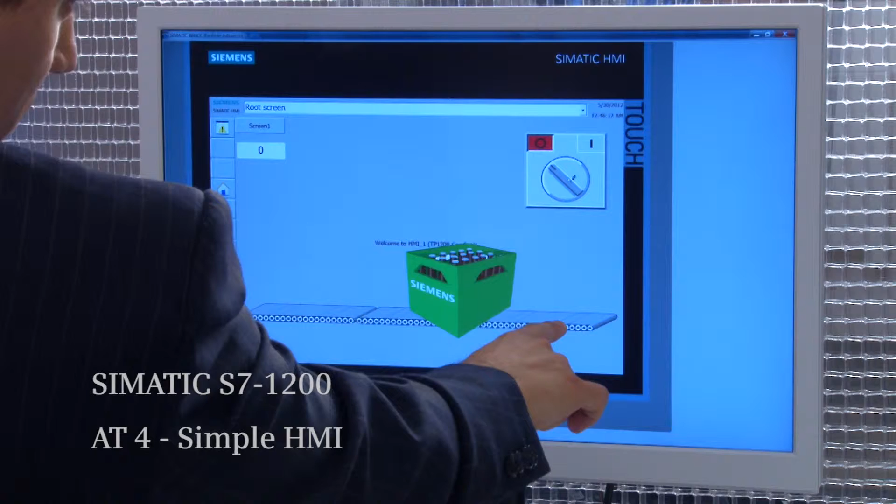The ability to easily add an HMI to your current automation system can be a huge advantage. Let me show you how easy it can be.

So the first step is, you see our current network view here. We only have the controller. First step is add new device. Click on HMI, comfort panel, 12-inch, and click OK.

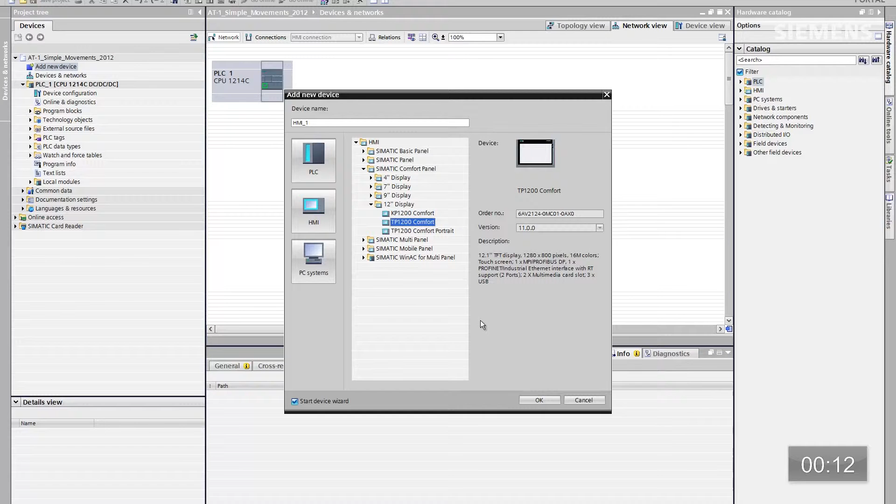So ultimately what the portal is doing for us at this point is creating a wizard for us. We're going to have a pop-up box that easily walks us through the entire HMI architecture we want to use for this particular system. There's a PLC connection as the first button. We're not going to use that. We don't care. Click on Next.

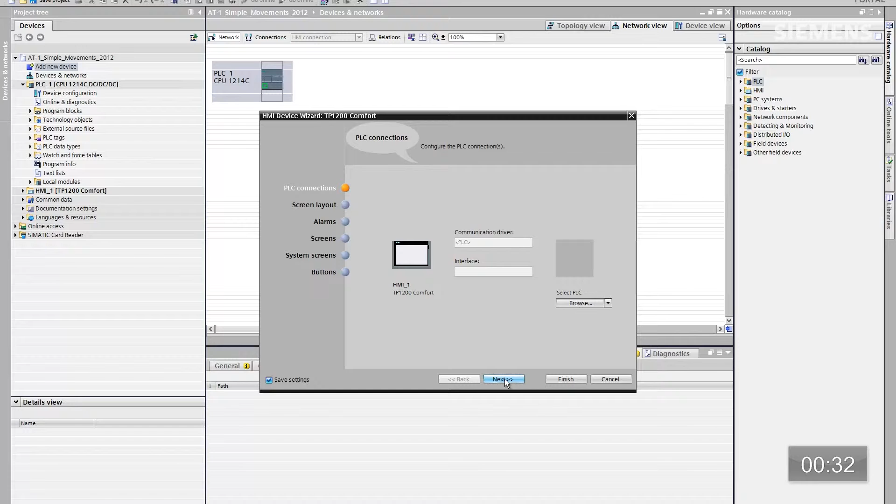You can change the background color here, screen title, navigation field, date, time, logo, whatever. We're going to leave those defaults. Here's the alarms. We're going to keep the defaults as well.

The screens. Here you can actually create your standard architecture of your screens. That way every single time you have a new HMI you can easily go through the wizard and create those screens very fast and efficiently. We're going to leave root screen and screen 1, that's no problem. System screens, we're not going to use any.

And the buttons, as you can see, for this application I want to move them to the left instead of the bottom, and I can easily manipulate the system buttons back onto this with just dragging and dropping them on. And there are my system buttons on the left-hand side now. At this point, I want to click on Finished.

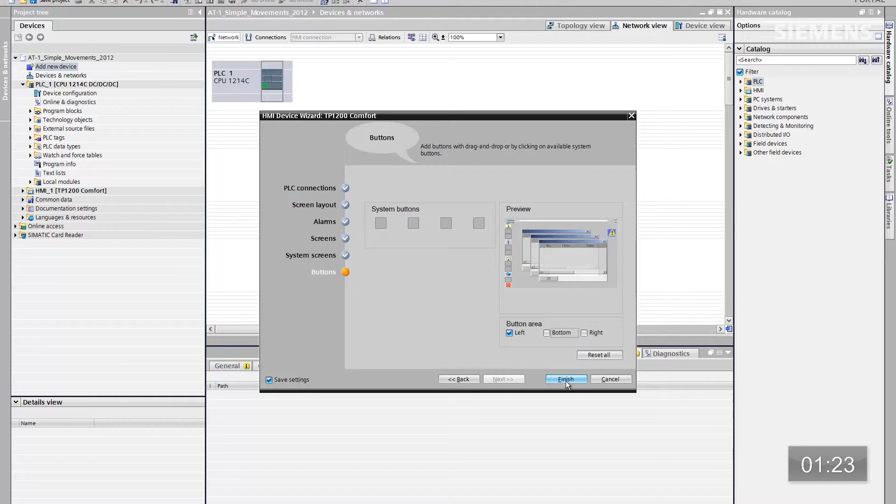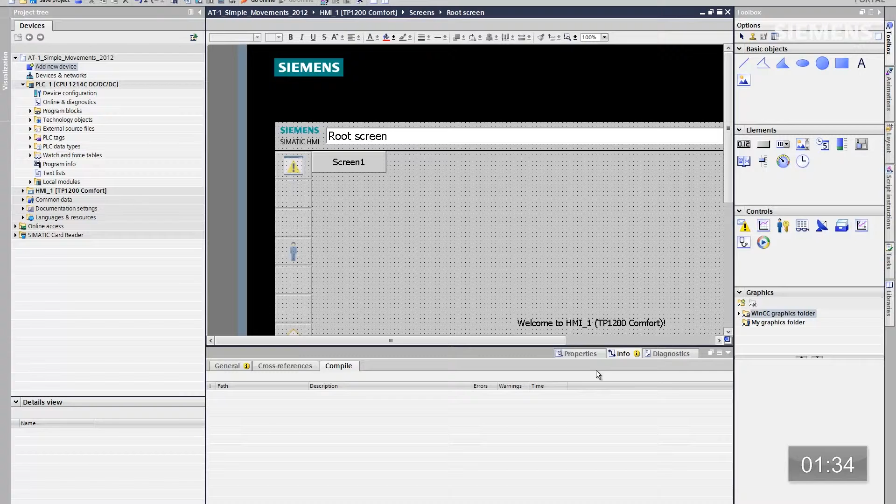So ultimately, what the portal is going to do for us is give us a photorealistic view of this HMI and the screens we just created. Here they are. Let me minimize this and go to Fit to Screen. So here's our root screen.

If we want to add a new screen, all I got to do is go back here in the tree structure and just double click on Add New Screen. Again, it'll give us another photorealistic view of that new screen.

Click on Fit to Screen, and if you want to change an attribute of that screen, now that I have focus on it, I can right click on it, go to Properties, or if I want to change the name, that's what I want to do. Change it to 2. So now I have my root screen, screen 1, screen 2.

If I want to have navigation buttons for this root screen, all I have to do is drag and drop them on. There's root screen. There's screen 1. Now I've got my navigation buttons.

Now that I've accomplished the new screen and all the standard HMI architecture, what about actually tying it to the current code? Something I want to show you real quick. If I go back to Device and Networks, you'll see now I have my current automation architecture including the new HMI, but they haven't been networked together yet.

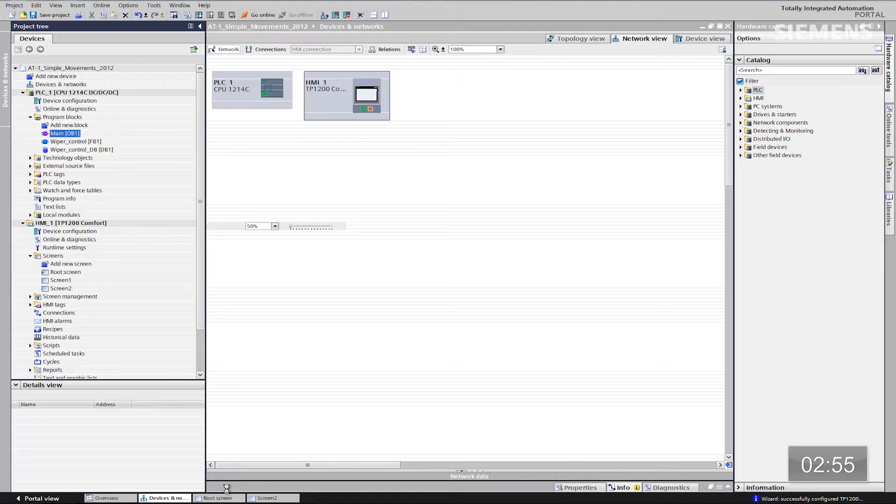If I actually go back to the code of the current control system, program blocks, main OB, let's double click on that. Now that I have the code of the automation architecture, I want to give focus to the root screen and choose split screen. So now I have the actual brand new root screen as well as the code from the current automation architecture.

If I want to tie them together, what I want to do is just go grab a bit field from the code, drag and drop it on. And you see I get these little alignment bars just like you get when you do anything in PowerPoint. That way you can easily take boxes and make them align the way you want to.

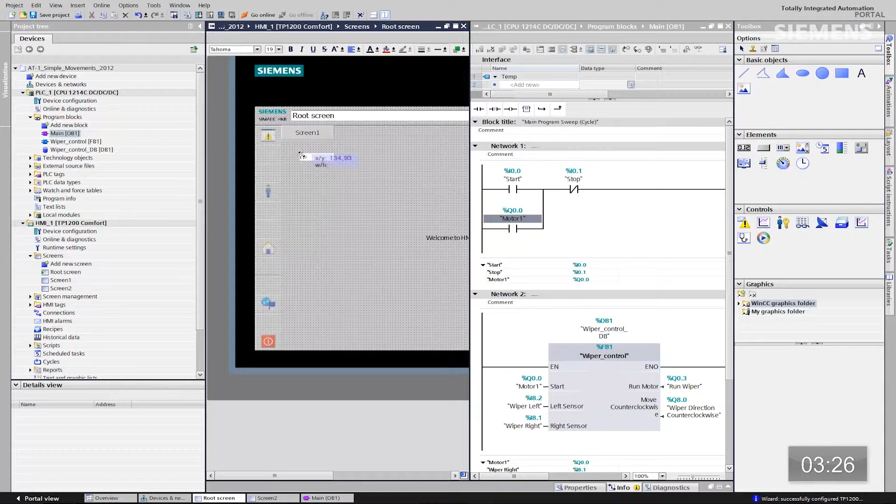If I want to resize, refit this I/O field, all I got to do is go grab one of the corners, drag it to wherever I want it to go. If I want to actually do an attribute change, just give focus to it, click on Properties. Let's change the text size, for instance.

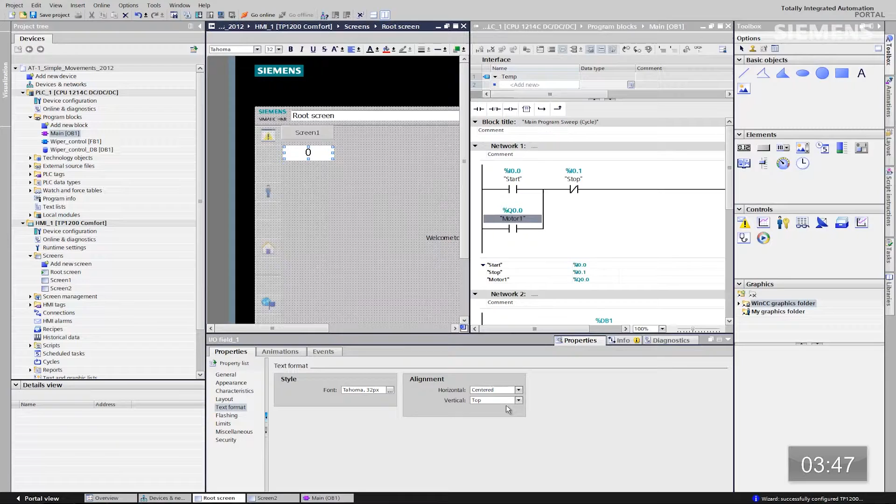Instead of 19, we want to use 32. Click OK, and I also want it to be centered. So now I've changed the attributes of this I/O field. Let me click off the split screen and let me show you the device and networks.

So now if I click on this little icon here, Show Address Labels, the moment we pass that I/O field from the code to the actual HMI panel, it automatically created the Profinet network, the IP addresses, device names, including even the logical connections. It did everything in the background for us. That's how smart the portal really is.

Okay, so the network is now complete. How about the actual control? Let me go back to our root screen. Let me drop this down and let me go to our libraries.

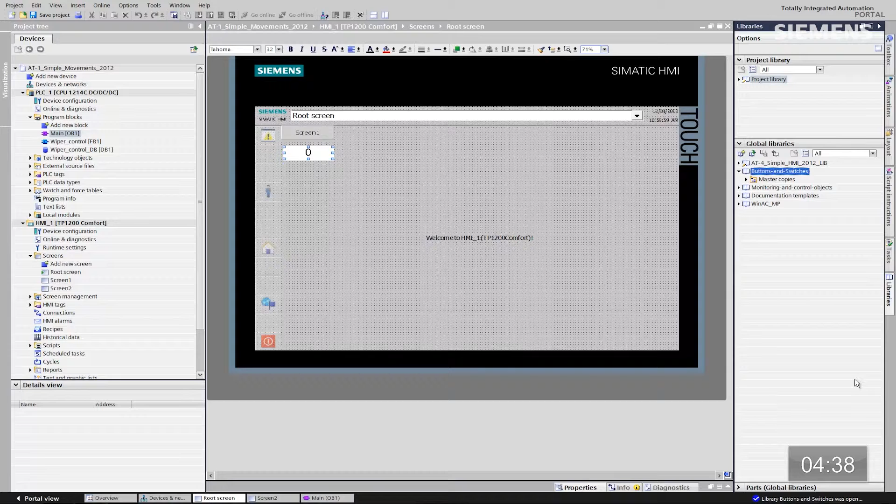So now I want to add buttons and switches. Let me give focus to that. So ultimately we're going to launch a library of different types of buttons and switches we could use for controlling. Now that we have them launched, let me go down to the rotary switches.

Let me drag that on, resize it, refit it however I like. And then I can use the alignment bars to make certain everything looks good on this HMI screen.

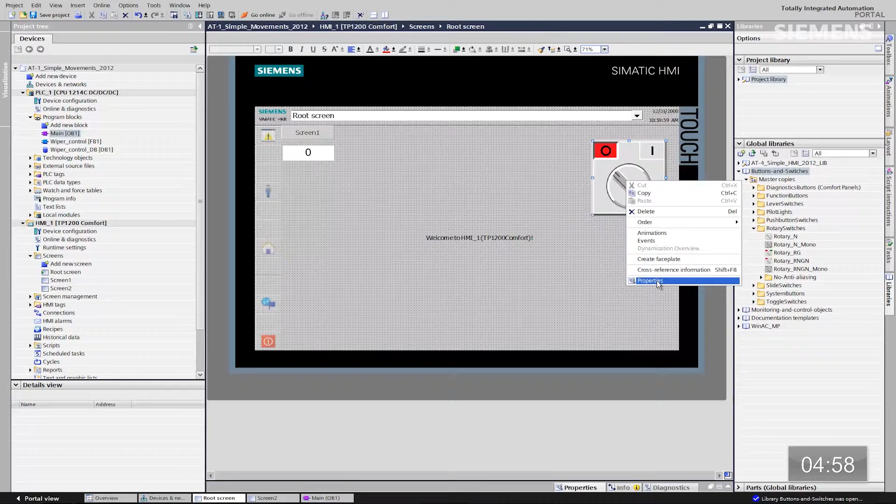Give focus to it, right click, properties. What I want to do is go to general, go to the tag, and since I know the code from the current automation system, I know exactly which tag I want to use to tie to this rotary switch so I have actual control between the two systems. So let's just type motor 1. That's the one I want to use. Use smart type. There's the tag, so now our control code from this rotary switch to the actual code itself has now been tied together.

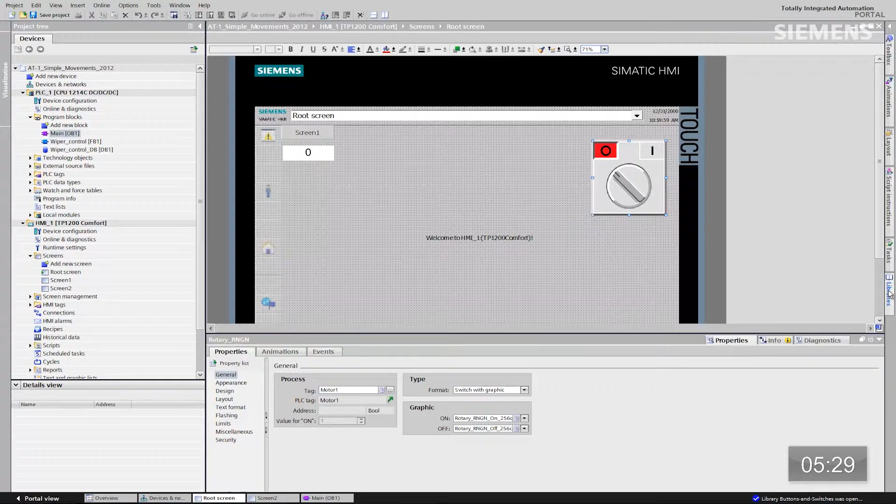Okay, how about animations? Let me give focus to this, and let's choose that library. So we have the ability from the global library concept to take any kind of graphic, animation, whatever you want. You can make it exactly how you want on your HMI panel. Once you've done that, you can save it to global library, and every single time you have a new HMI panel come online, you just drag it onto the panel, and you're actually completed and done. All you got to do is tie it to the code.

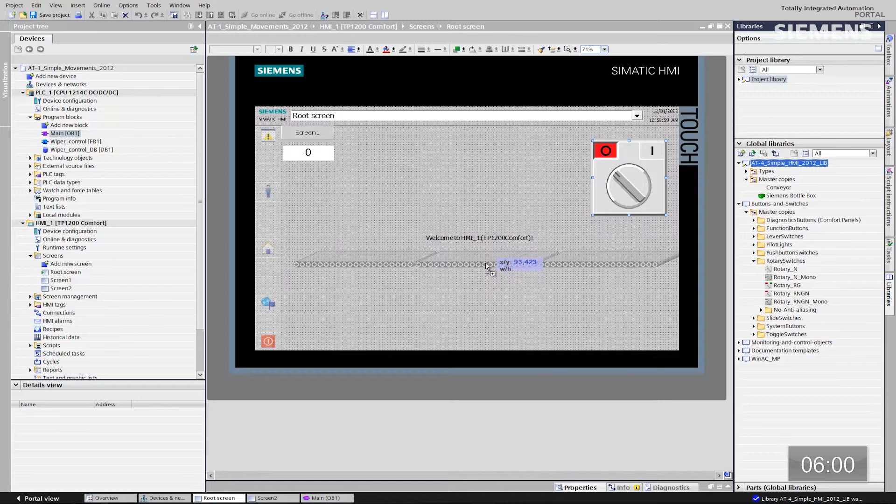Let's do exactly that. Let's drag this conveyor down. So we're going to have a conveyor on this panel. Resize, refit.

And I'm going to have a Siemens bottle box. Now that I have focus on him, I want to right click and go to properties. Go to animations and click on horizontal movements, so I can do an on-the-fly animation of a horizontal movement. It gives me a shadow box plus an arrow. If I go over here and give focus to it, drag that arrow over to the endpoint. So there's a point of start, there's a point of end.

And this is going to be tied to an analog value. So let me go down here and type 27,000 because this will be an analog word. And the start point is going to be 1,000. However, I don't have a tag I want to use from our analog inputs, so let's go do that first.

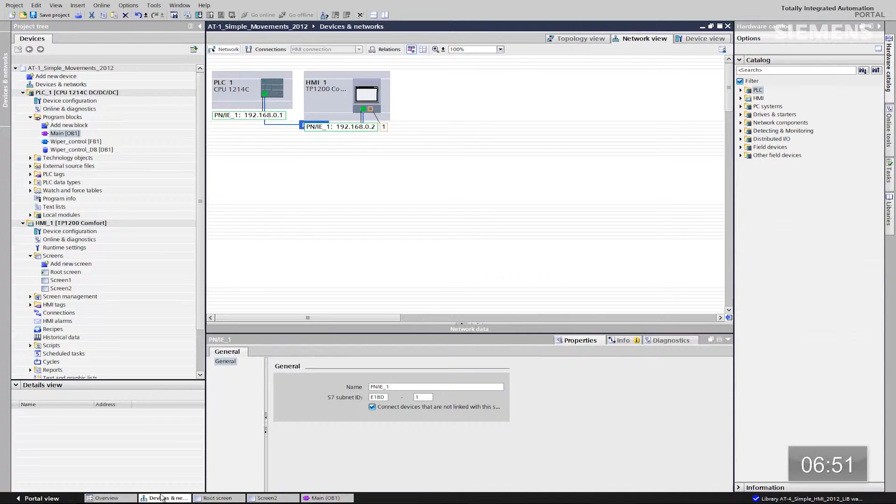Let's go back to our device and networks. Give focus to the actual CPU. Click on device view. Now give focus to the analog card, and you'll see that we have analog input word 112. That's the one I want to use. I'll also go back to a plus or minus 10 volts so that I have a full range of that analog word.

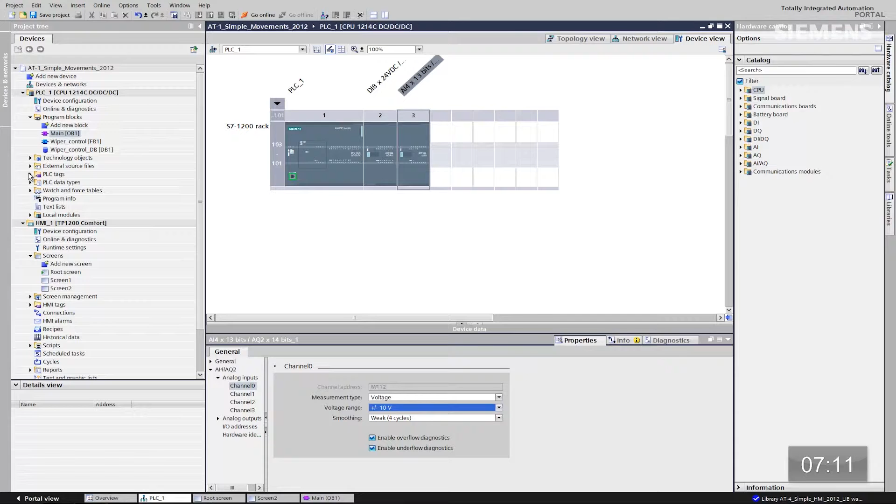Let's go to our tags. Show all tags. As you can see here, all I have to do is type IW112, click enter. At this point, the tags will give you the possibility of creating the actual data type as well as the tag name for that analog word automatically. You don't have to do anything. I'm going to use this current tag it auto-created for me.

That's fine. Let's go back to the root screen. Give focus to the actual bottle box. Click on animations and just click TAG. Smart type. There is the tag 1. That's what I want to use.

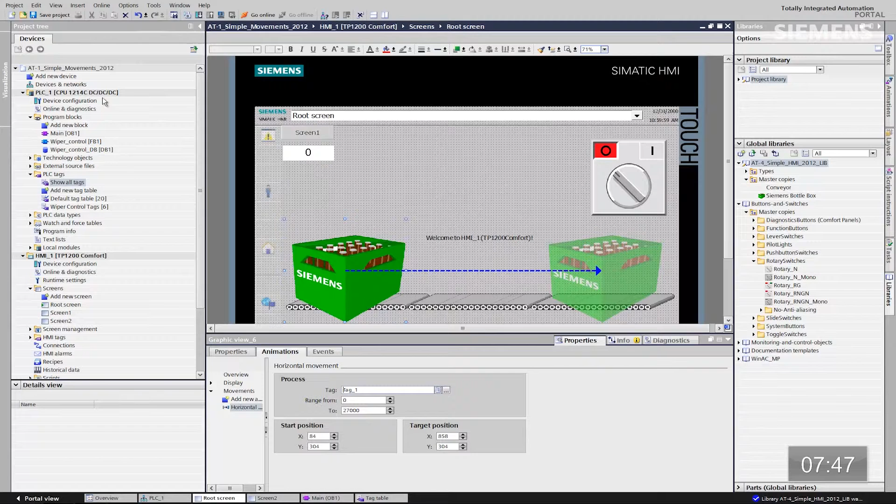At this point, I can give focus back to the CPU. Click the download arrow button. What the system will do now is going to go out and search the network and try to find this automation system. It's going to give us a dialog box over Profinet. He's searching. He has found the IP address of that controller.

I can actually click on the flash LED button. So now I've clicked on that. It's actually going to go back out over Profinet. It is the correct controller at this point. I can click the load button. So now what he'll do is he'll do a quick compilation of this analog word and this tag and the logical connection over Profinet to the control system for us. Click on load. Now we've loaded that simple connection.

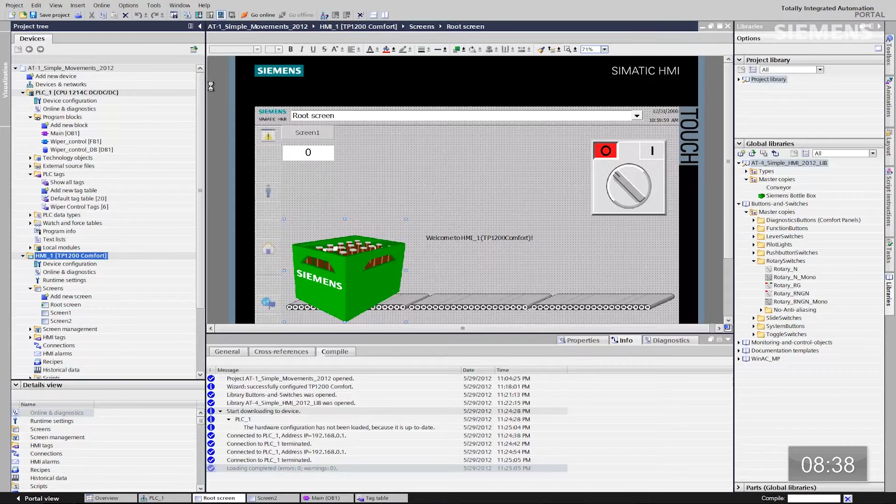What I want to do now is give focus to the HMI, and you'll see this little box up here is called the Start Simulation. I'm clicking on this. Ultimately, we have the ability to virtualize an HMI panel. You don't have to have the physical hardware to do it. We can tie that directly to the automation system and prove out the fact that that system works before you have to actually go out and buy the hardware.

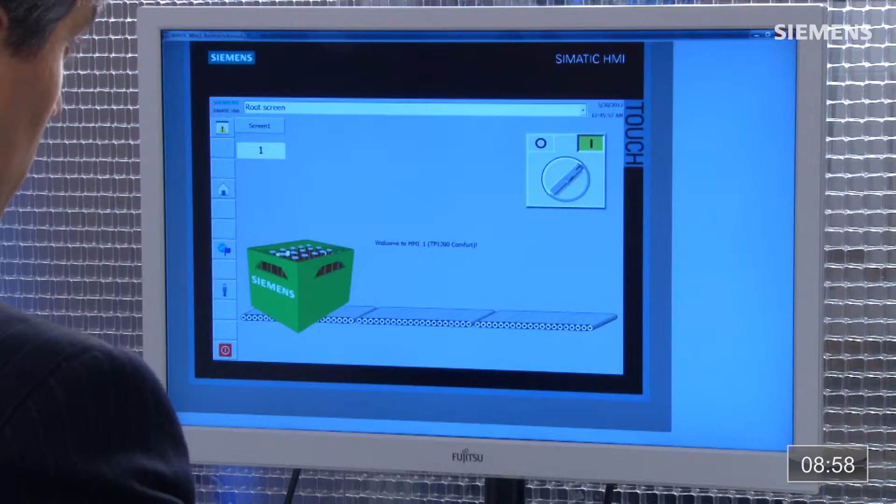Let me give complete focus to it. So you can see here we have the virtualized panel at this point. Our bit field is 0 and our switch is in the off position. If I click on the switch, you can see our motor is running now and our bit field's gone to 1, so that means that we are in a run mode. If I turn that switch off, you can see everything has gone back to a steady state and it's stopped.

If I come back to the analog potentiometer, I can come over here and I can move the bottle box and I'm able to do the entire animation of this bottle box, including all this HMI. I did it in a matter of minutes. Now that's engineering efficiency.